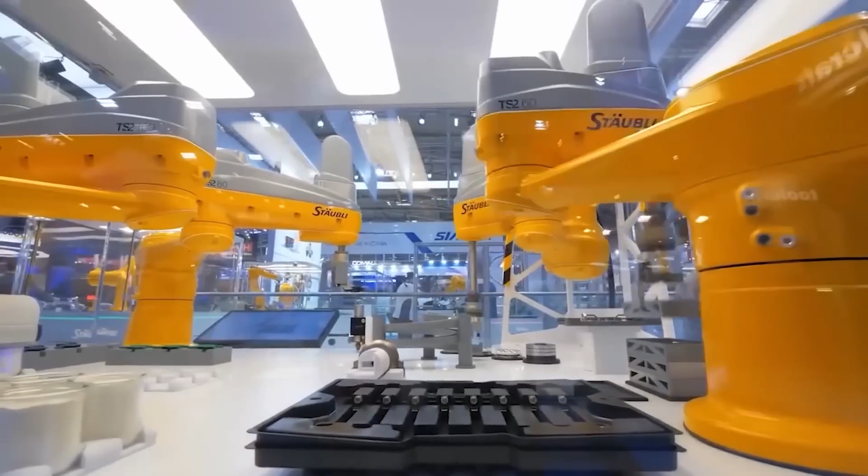But that narrative completely collapsed overnight when Elon Musk stepped onto a sunlit stage at a surprise Tesla event and announced a breakthrough that sent shockwaves straight through Detroit, Tokyo, and Beijing. Tesla had unveiled a new battery architecture capable of delivering a mind-boggling 2,000-mile range on a single charge, alongside an astounding 4-minute fast charge time.

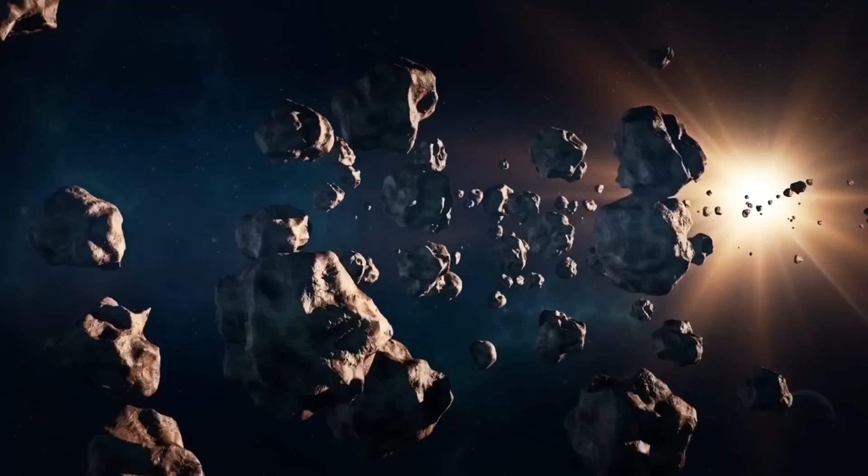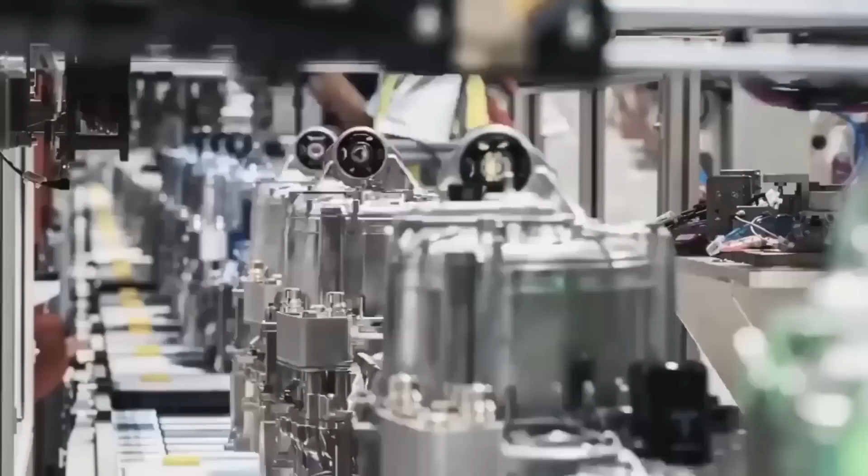The announcement did not just raise the bar for electric transportation. It obliterated the entire playing field, leaving legacy car companies and oil cartels staring into an abyss of immediate obsolescence. Wall Street trading desks went into absolute chaos as analysts scrambled to understand how Tesla accomplished what elite materials scientists

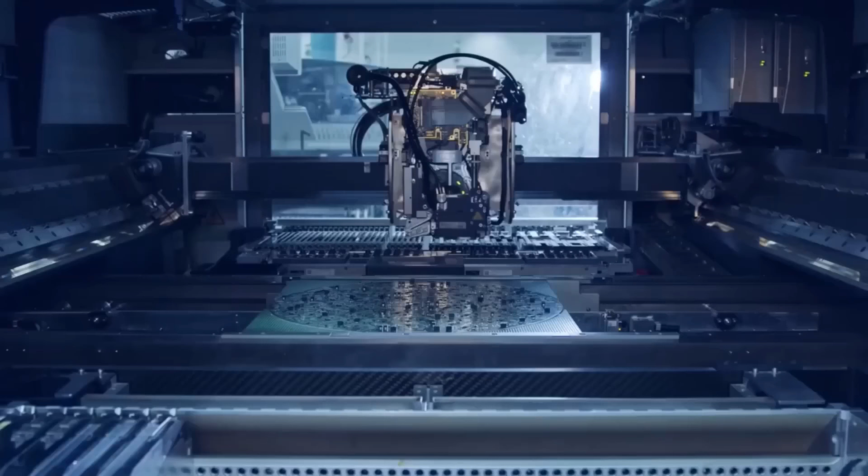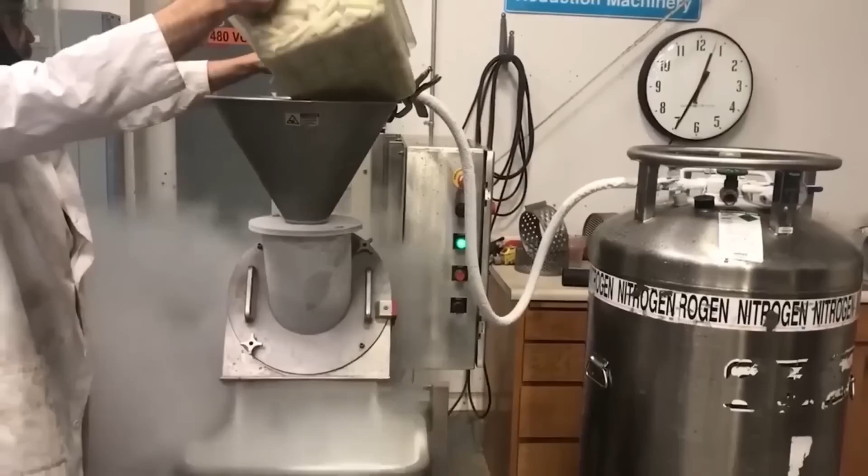insisted was impossible. But as the initial wave of euphoria settled across the internet, big questions began to surface regarding how this tech actually works and whether it is truly ready for mass production. And what revealed itself under the hood proved far more complex than anyone could have anticipated.

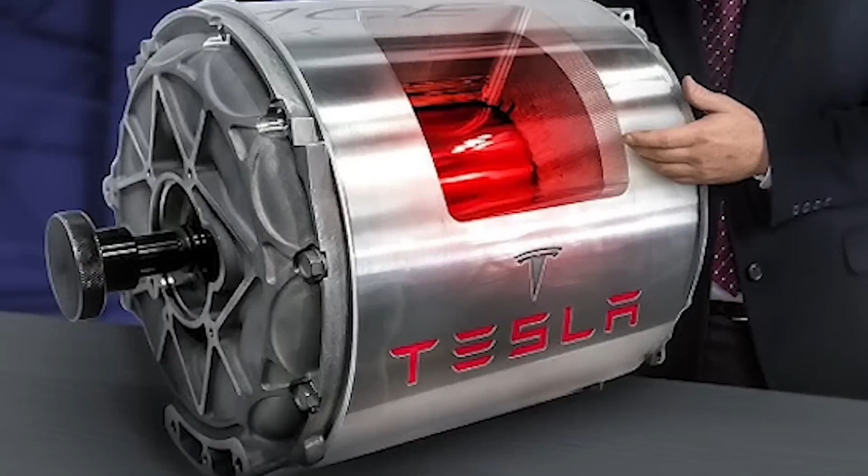For years, the EV industry was locked in a bitter struggle against the fundamental limitations of traditional lithium-ion cells. Standard electric vehicles rely on liquid electrolytes, where lithium ions slosh back and forth between a graphite anode and a nickel-manganese cobalt cathode. While effective, this chemistry suffers from severe energy density ceilings, high thermal sensitivity, and slow charging rates caused by heat buildup and lithium plating.

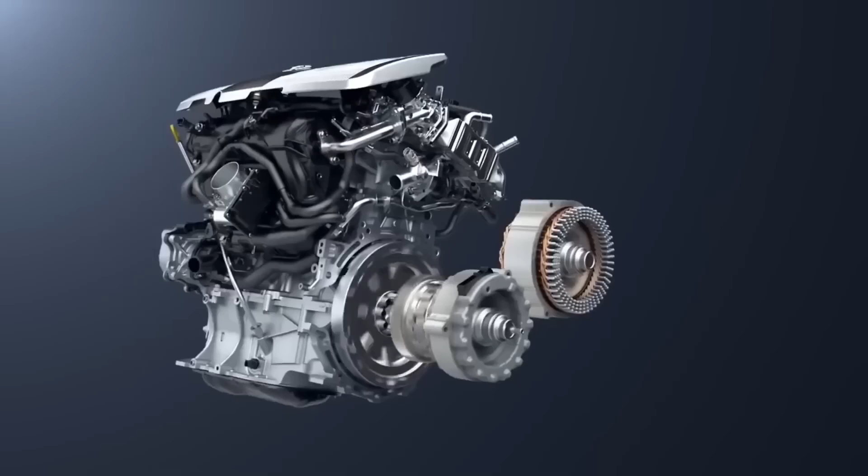Tesla's new power cell completely abandons these classic constraints by introducing a stabilized solid-state polymer ceramic matrix integrated with a nanostructured silicon anode. By replacing liquid fluid with a dense solid medium, Tesla managed to fit nearly 4 times the energy density into a pack that weighs less than the current Model S battery.

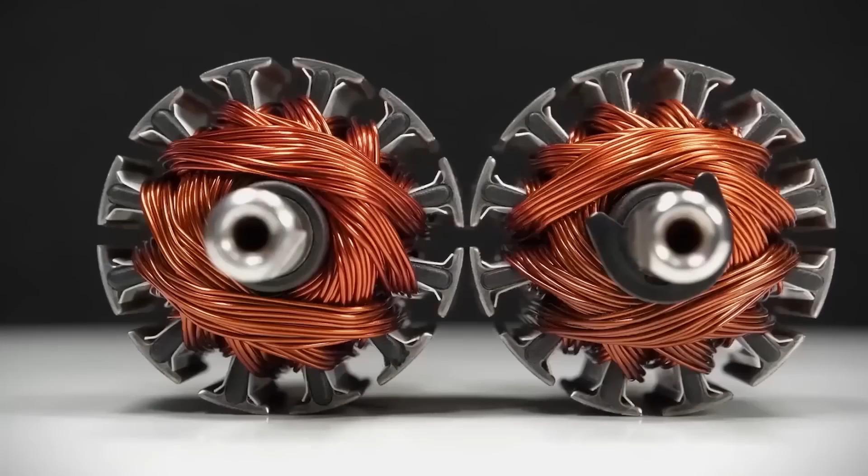Furthermore, silicon can hold 10 times more lithium ions than traditional graphite, but historical attempts to use it caused the material to swell up and crumble after only a few hundred cycles. Tesla solved this structural decay by wrapping microscopic silicon particles in an elastic graphene framework that expands and contracts naturally without degrading. The result is a pack so dense that range anxiety is killed off entirely in a single stroke.

But packing that much energy into a tiny space created an entirely new engineering nightmare that almost destroyed the project before it ever saw the light of day. To achieve a full charge in 4 minutes, a battery must accept an unprecedented torrent of electrical energy without overheating or melting its internal components.

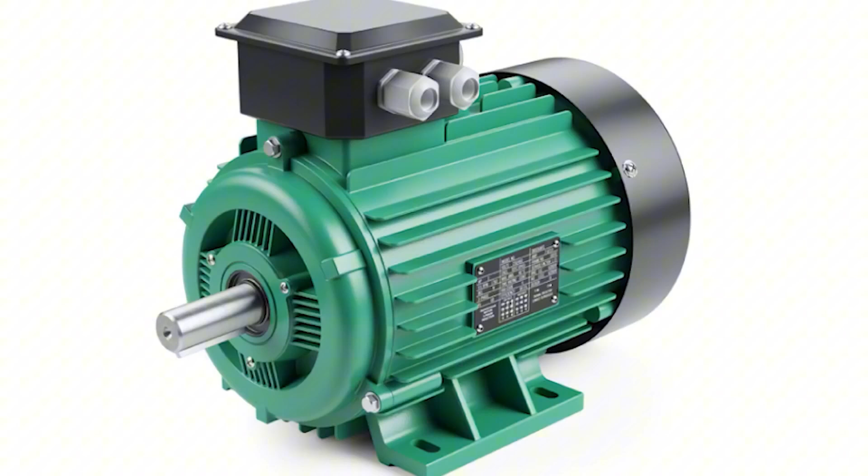Traditional fast chargers cap out at around 250 kilowatts, taking roughly 20 to 30 minutes to push an EV battery to 80%. Pushing 2,000 miles worth of power into a vehicle in 4 minutes requires charging speeds exceeding 1.2 megawatts, a massive power flow typically reserved for heavy locomotive trains or industrial power grids.

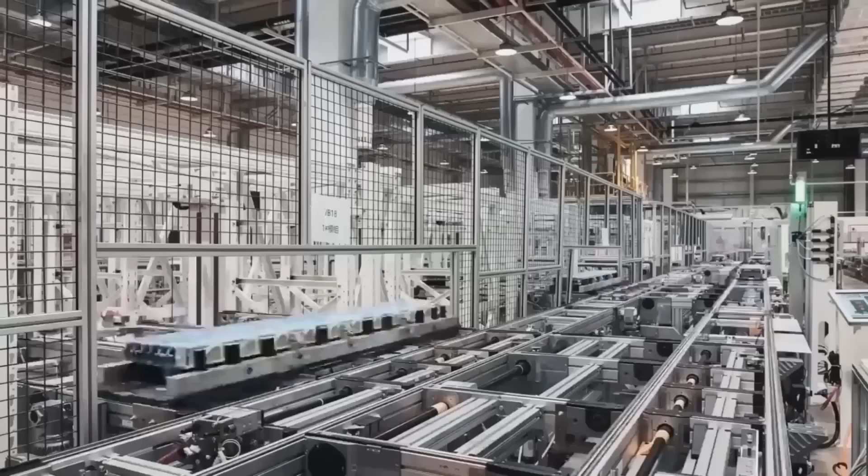To prevent the battery from violently overheating under this intense current, Tesla developed a direct immersion cryogenic cooling system using a non-conductive synthetic fluid that circulates directly around every individual cell. This liquid absorbs heat instantly, at the atomic level, keeping the solid-state chemistry perfectly stabilized, even as megawatt-level energy surges into the chassis. Engine components that would normally degrade under high heat remain completely cool to the touch throughout the

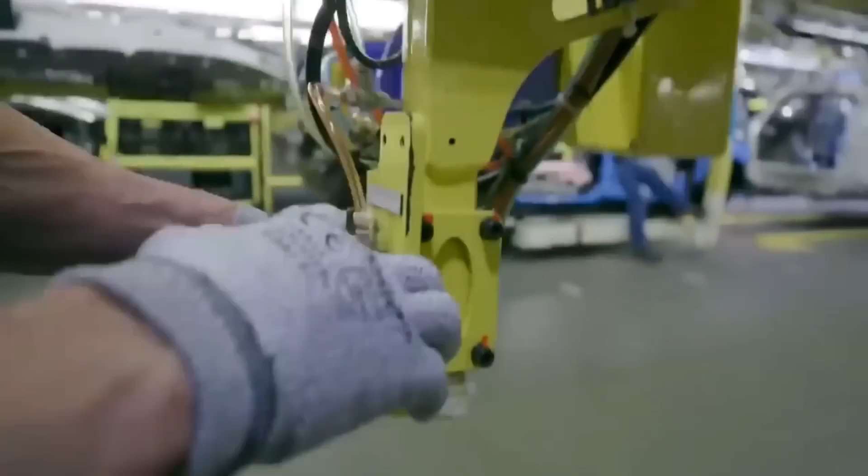entire process. The math behind it seemed almost unreal to veteran automotive engineers who had spent their entire careers claiming solid-state batteries could never handle high-current rapid charging without catching fire or forming microfractures inside the solid electrolyte. But Tesla didn't stop at solving the chemistry and thermal challenges, because manufacturing millions of these cells posed an even bigger hurdle.

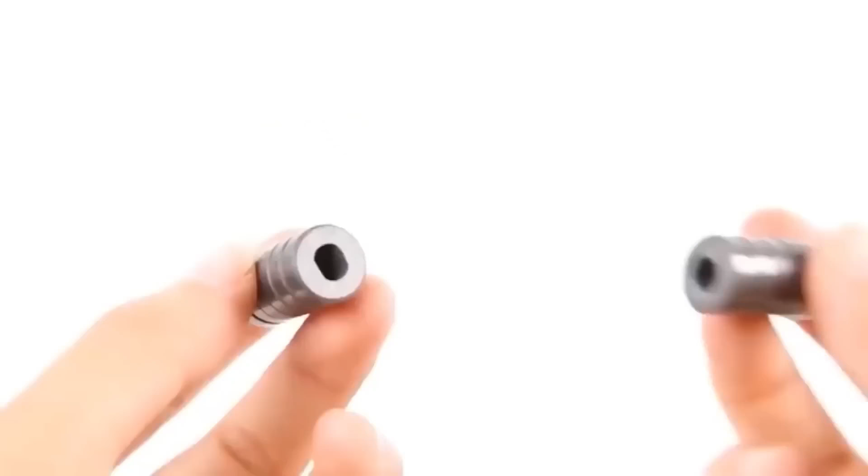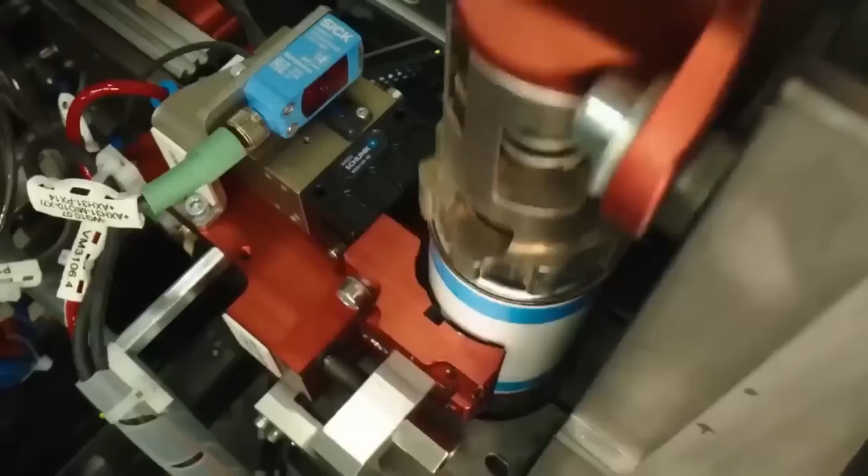The real secret behind this battery shift lies in how the cells are built inside Tesla's massive gigafactories. Traditional battery production requires massive, energy-inefficient baking ovens that take up miles of factory floor space to dry chemical slurries applied to copper and aluminum foils. This legacy wet coating method is notoriously slow, insanely expensive, and responsible for massive toxic solvent emissions.

Tesla bypassed this roadblock by perfecting the dry electrode coating process, a technology originally acquired from Maxwell Technologies years ago that took almost a decade of continuous engineering torture to master. By pressing dry chemical powders directly into ultra-dense metallic sheets using giant high-pressure rollers, Tesla completely eliminated wet solvents, toxic chemicals, and giant drying ovens from the production pipeline.

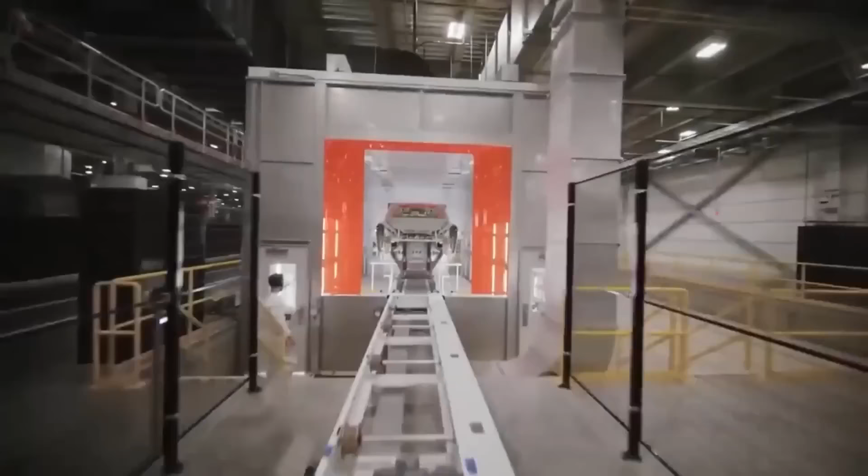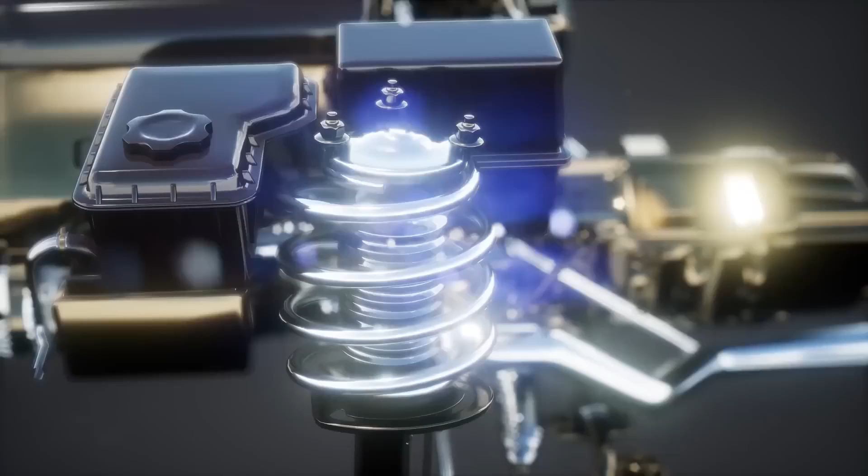This manufacturing shortcut slashes battery production costs by nearly 45%, while reducing the physical footprint of the factory by over half. Suddenly, the dream of a cheap, hyper-efficient, 2,000-mile electric car transformed from a theoretical science experiment into a terrifying commercial reality for every other automaker on planet Earth.

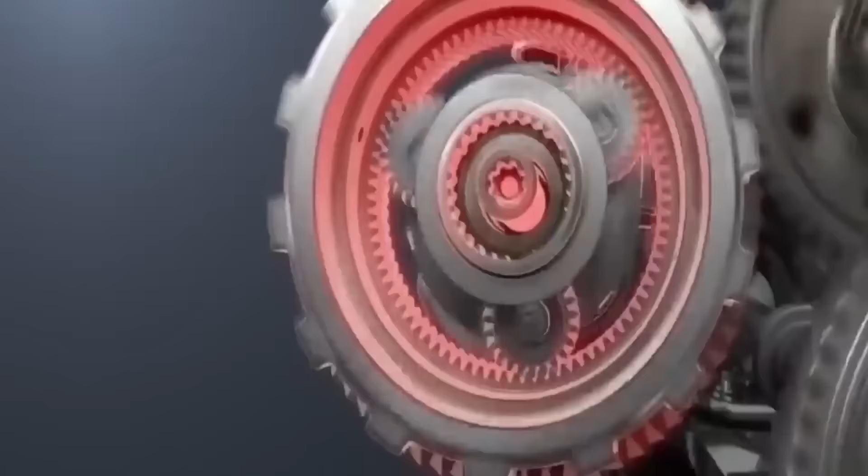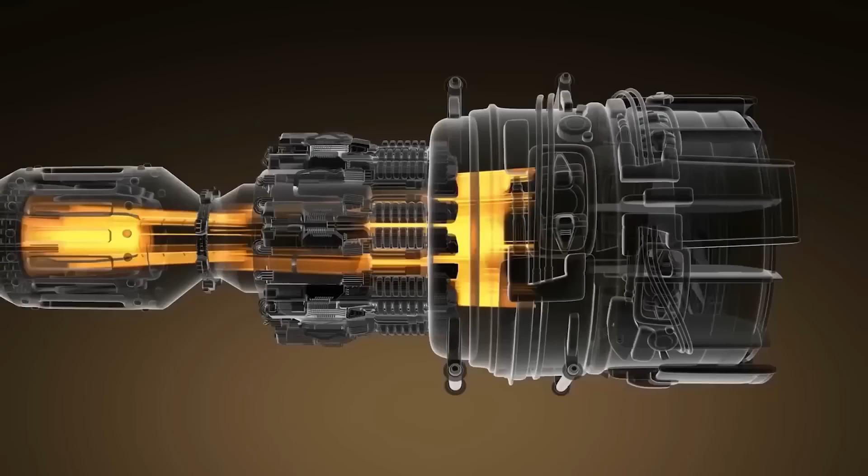And when news of this manufacturing efficiency leaked out to rival boardrooms, absolute panic broke out across the globe. In Tokyo and Detroit, executive teams called emergency board meetings to assess the damage to their long-term business models. For years, companies like Toyota had bet heavily on hybrid vehicles and slow-burning solid-state research programs, repeatedly assuring shareholders that full battery electric dominance was still decades off.

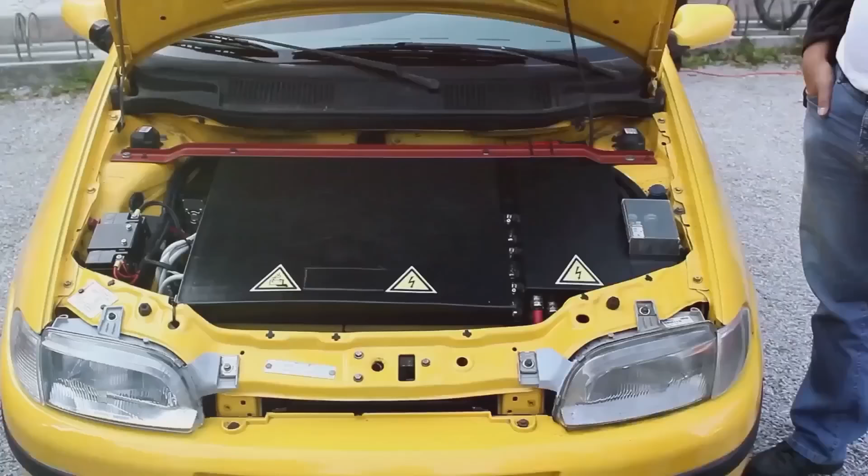Other legacy giants were already losing thousands of dollars on every single first-generation EV rolling off their assembly lines due to sky-high battery material costs. Tesla's sudden leap forward effectively turned existing multi-billion-dollar EV factories across the world into instant technological relics before they even reached full capacity.

If a consumer can buy an electric car that travels 2,000 miles on a 4-minute charge for less than the price of a standard gas sedan, the economic justification for internal combustion engines completely evaporates overnight. Gas stations, oil refineries, and traditional dealership service bays suddenly face a rapid glide path toward extinction, as consumer demand shifts violently toward zero-maintenance, ultra-long-range electric transport.

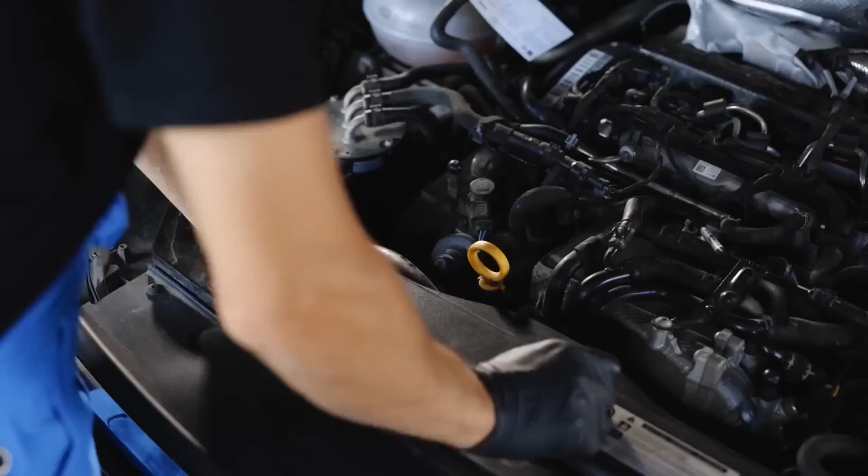Yet, while Wall Street hypes the stock to astronomical heights, veteran industry analysts point out that Elon Musk has a long and complicated history of making promises that do not always match up with real-world launch schedules. Critics and short sellers immediately seized on the announcement, reminding the public of past claims that took years longer to deliver than originally advertised.

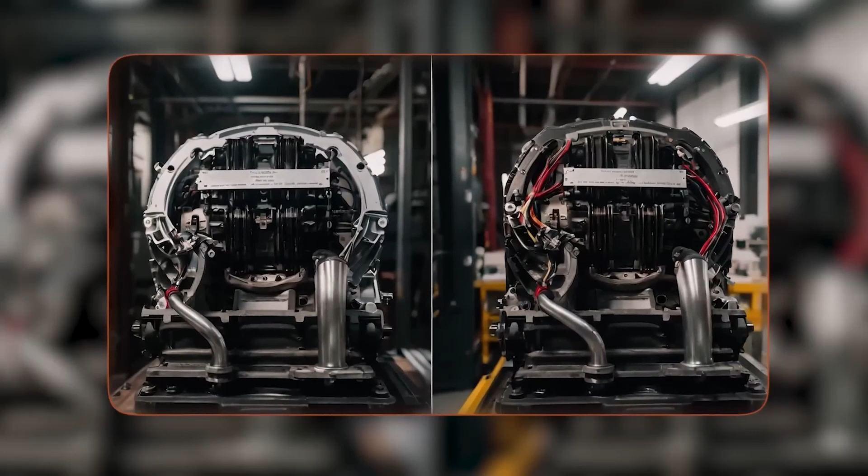From the full self-driving timeline to the long-delayed Tesla Roadster and Cybertruck production hell, skeptics argue that showing off a functional prototype cell in a laboratory setting is vastly different from mass-producing millions of flawless battery packs annually.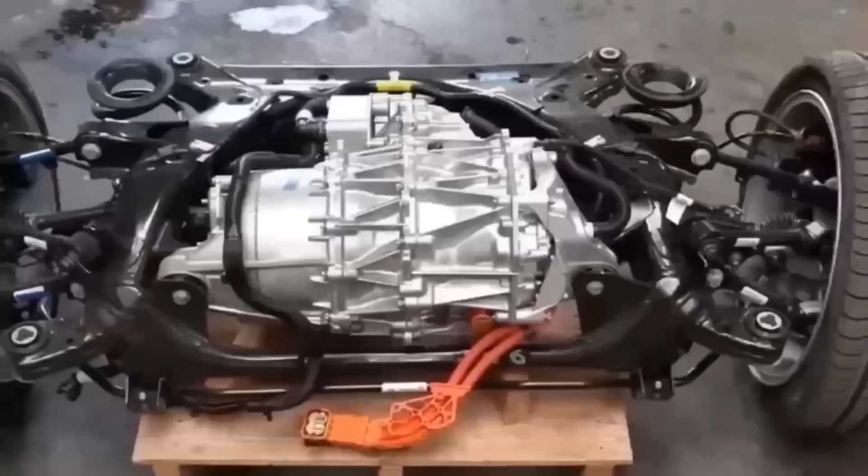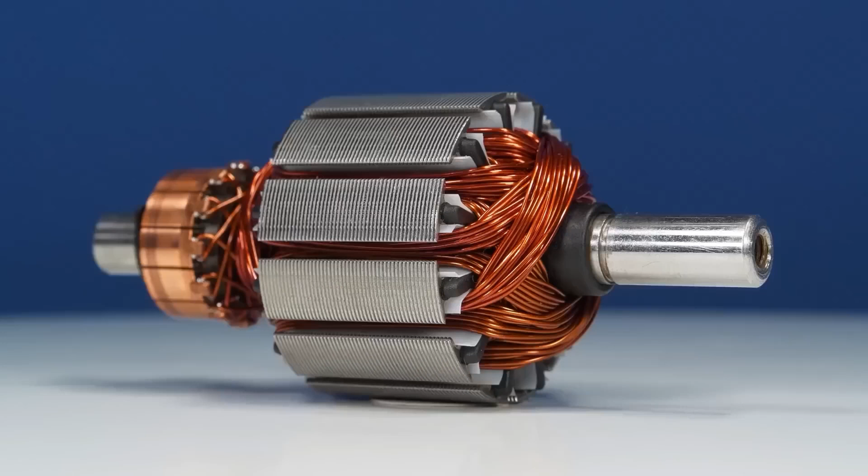Materials experts from elite universities quickly raised red flags concerning the long-term degradation rates of solid ceramic electrolytes subjected to real-world road vibrations, freezing winter temperatures, and intense summer heat waves. If tiny microcracks form inside the solid electrolyte over time, microdendrites could still short out the cell, causing sudden battery pack failure long before the promised million-mile lifespan is reached.

Furthermore, charging hundreds of thousands of 2,000-mile EVs at 1 megawatt simultaneously poses a terrifying threat to localized power grids that are already struggling under heavy loads. Power companies would need to invest hundreds of billions of dollars upgrading electrical substations and installing massive localized energy buffer banks to prevent regional blackouts every time multiple drivers plug in for a 4-minute charge.

But behind all the engineering debates and grid logistics lies an even larger conflict brewing on the global geopolitical stage. The race to build next-generation batteries has quickly transformed into the ultimate war for global economic and technological dominance. China currently controls over 70% of the world's lithium refining capacity, 85% of synthetic graphite production, and a near monopoly on critical rare earth processing.

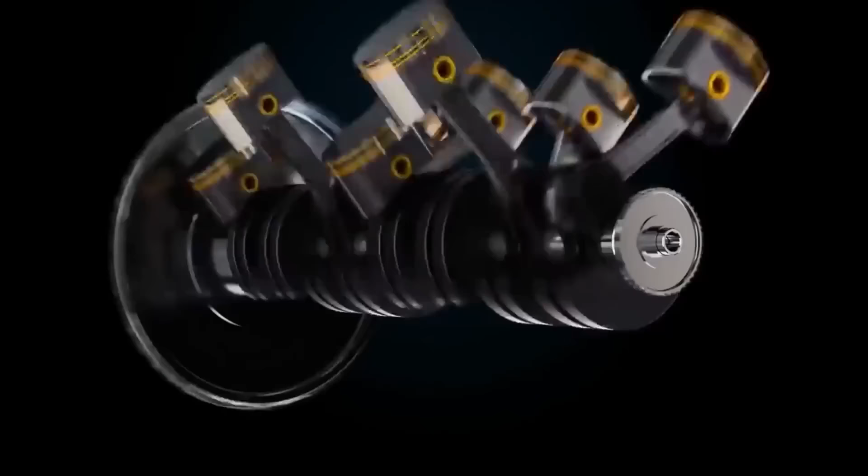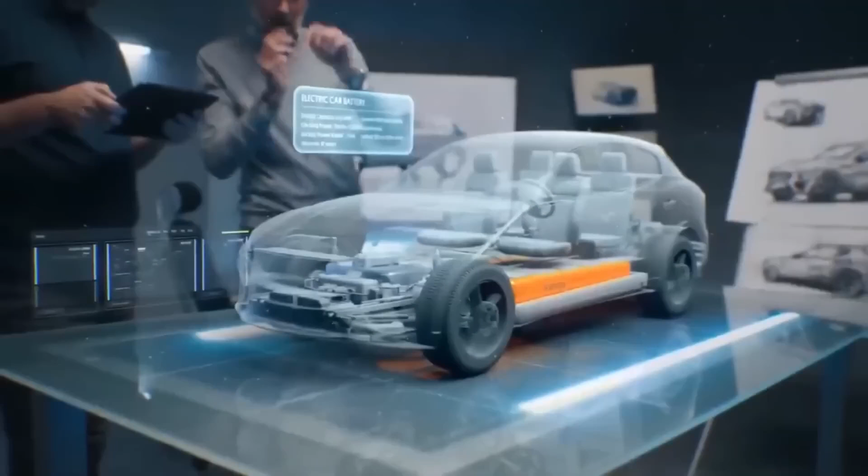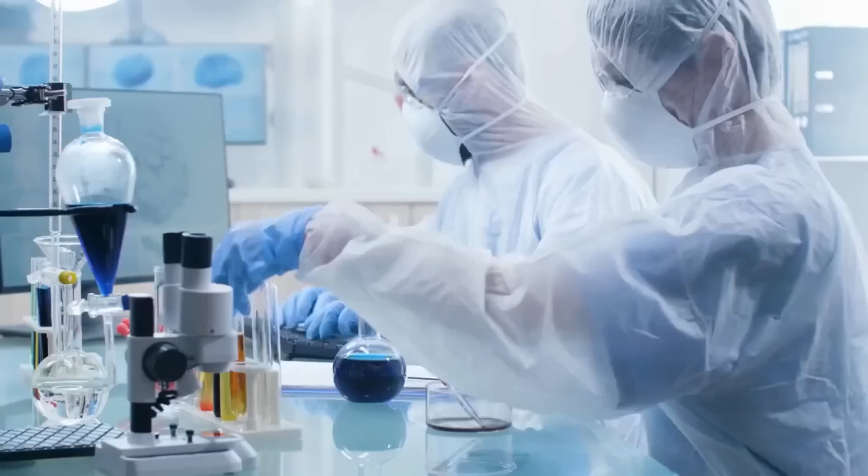Tesla's breakthrough shifts the primary raw material focus away from traditional refined graphite and towards abundant silicon and domestically sourced lithium deposits, bypassing traditional supply chain choke points controlled by foreign cartels. By establishing massive raw material processing facilities directly inside North America and securing localized supply chains, Tesla aims to completely insulate its production pipeline from foreign export bans, trade tariffs, and supply disruptions.

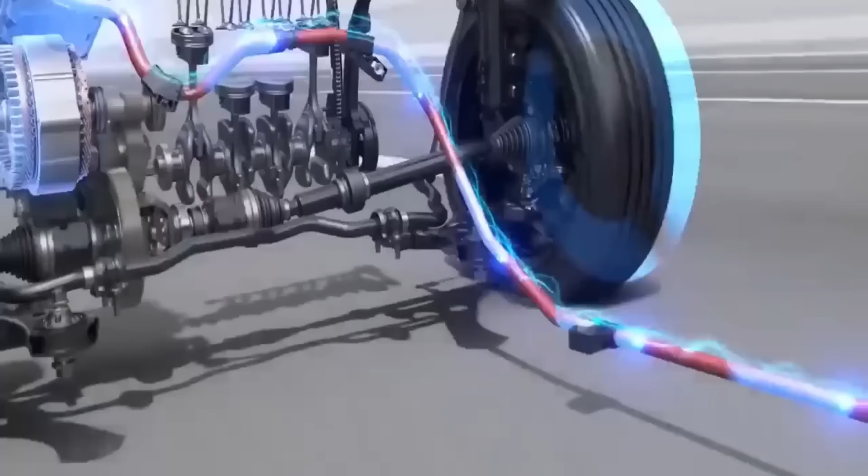This move not only threatens foreign battery juggernauts like CATL and BYD, but it also alters the geopolitical balance of energy independence for entire nations. Sovereign wealth funds, heavily invested in oil reserves, are suddenly forced to confront a world where oil demand could drop off a cliff far faster than predicted by energy agencies.

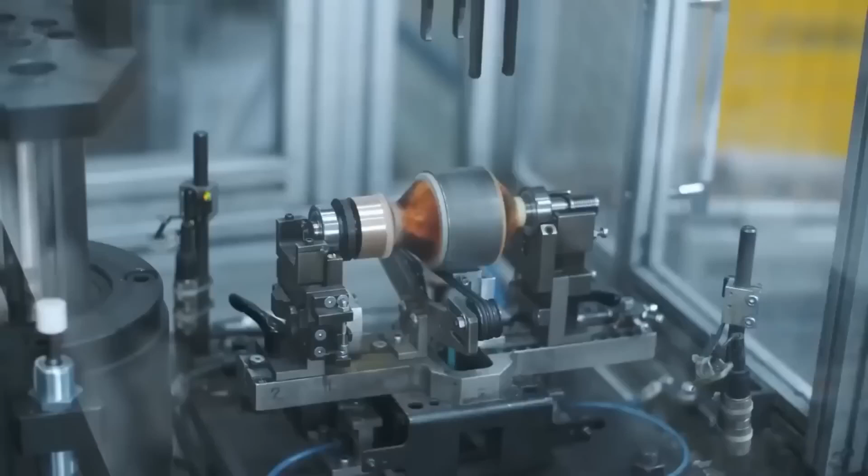Yet, just as the transition appears inevitable, hidden hurdles within Tesla's own manufacturing architecture threaten to slow down the entire revolution. Scaling the dry electrode process to produce billions of individual cells without microscopic defects has proven to be one of the most brutal engineering tasks ever attempted in modern industrial manufacturing. Even a microscopic dust particle, or tiny variation in powder thickness during the high-speed rolling process, can cause a catastrophic short circuit, rendering an entire multi-thousand-dollar pack totally useless.

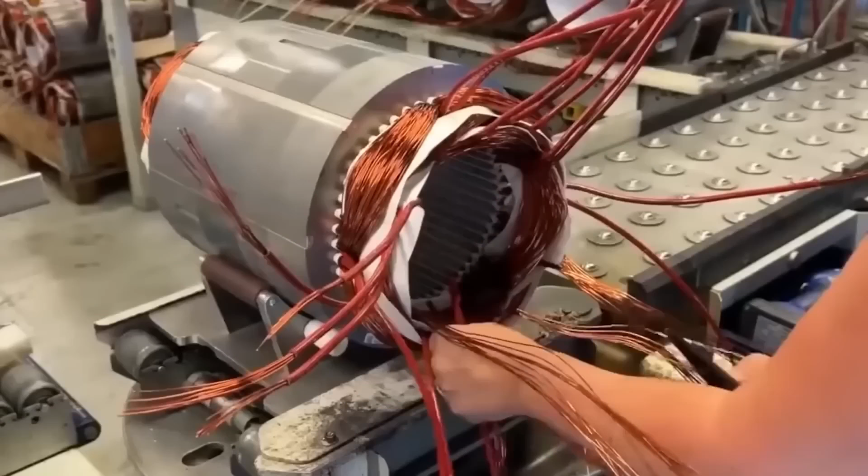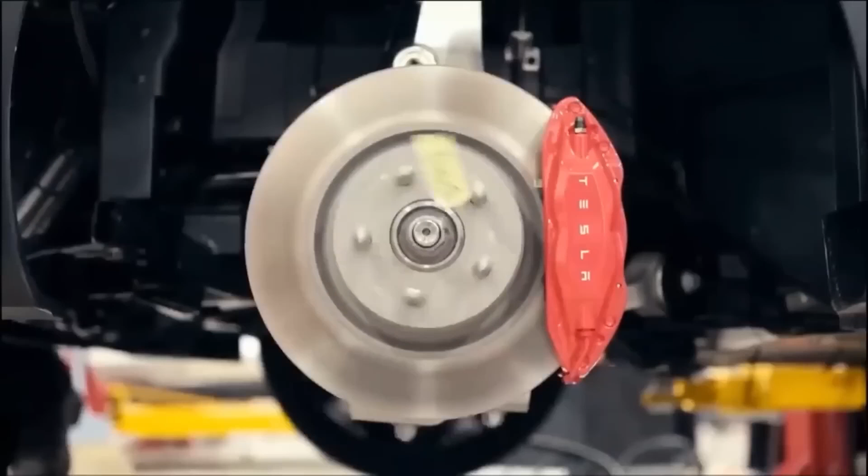Tesla's engineers are reportedly working around the clock inside Gigafactory Texas, attempting to calibrate advanced laser inspection systems and automated artificial intelligence quality control scanners to catch flaws in real time at microsecond speeds. Early yield rates for the new cell were rumored to be far below standard commercial viability, meaning Tesla must burn through vast amounts of cash and scrap material to refine the assembly line before mass production can hit full speed.

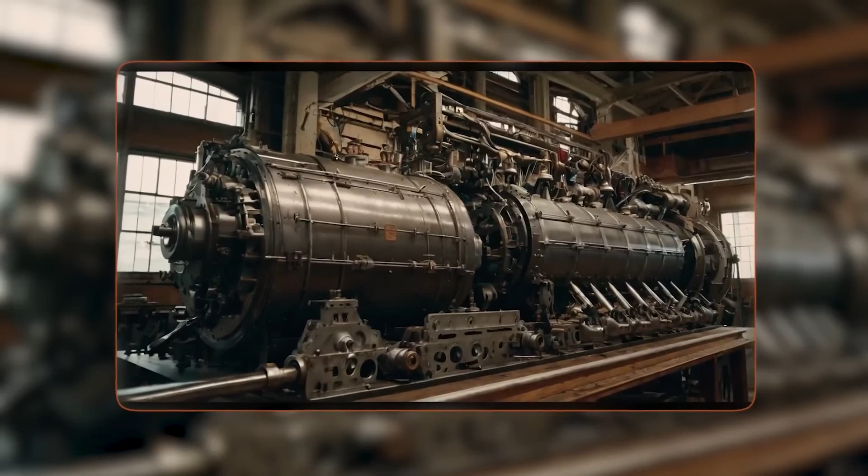If Tesla fails to overcome these yield bottlenecks quickly, the promised vehicle delivery dates could easily slip by months or even years, giving desperate rivals a tiny window of opportunity to catch up or engineer counter breakthroughs of their own. But if Tesla hits its yield targets, the implications for everyday society will extend far beyond just passenger cars.

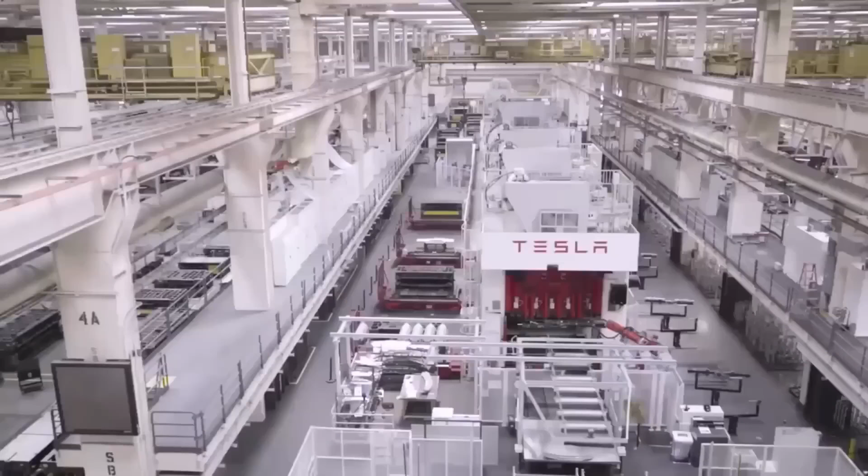Consider the immediate impact on commercial trucking, long-haul logistics, and air travel when energy density hits these high levels. Semi-trucks, which previously required massive, heavy battery packs that significantly cut into cargo capacity, could now haul full freight loads coast to coast, with minimal charging stops that match standard driver rest breaks.

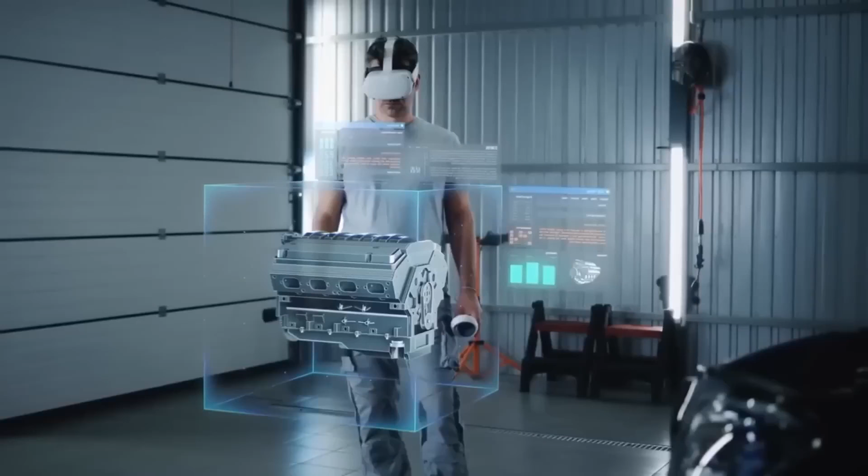Maritime shipping vessels, ferry networks, and even regional commercial aircraft could finally abandon diesel and jet fuel in favor of pure electric propulsion systems, drastically cutting global carbon emissions. The used car market would experience an unprecedented earthquake, as legacy gas vehicles and early-generation short-range EVs lose their resale value overnight, creating an unprecedented wave of technological obsolescence across global transportation networks.

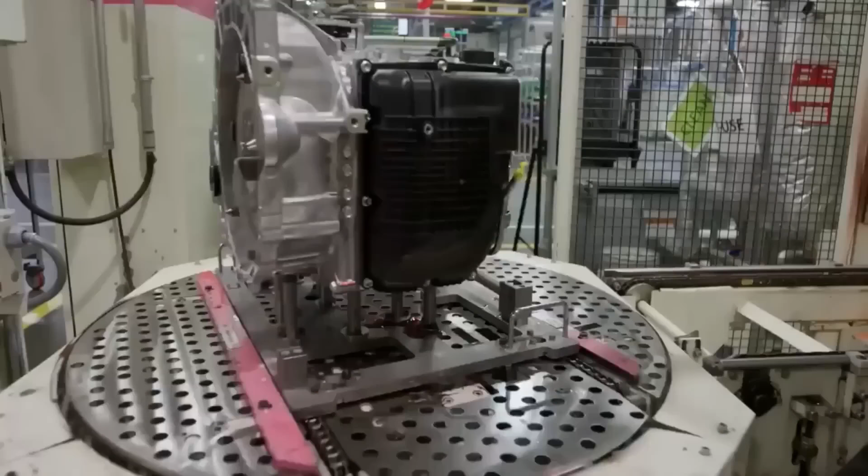Urban planning, highway rest stops, and commercial real estate would undergo a massive redesign to accommodate high-power megawatt charging hubs capable of cycling hundreds of vehicles through in a fraction of the time required today. The shift would represent the single largest energy transition since coal gave way to petroleum in the early 20th century.

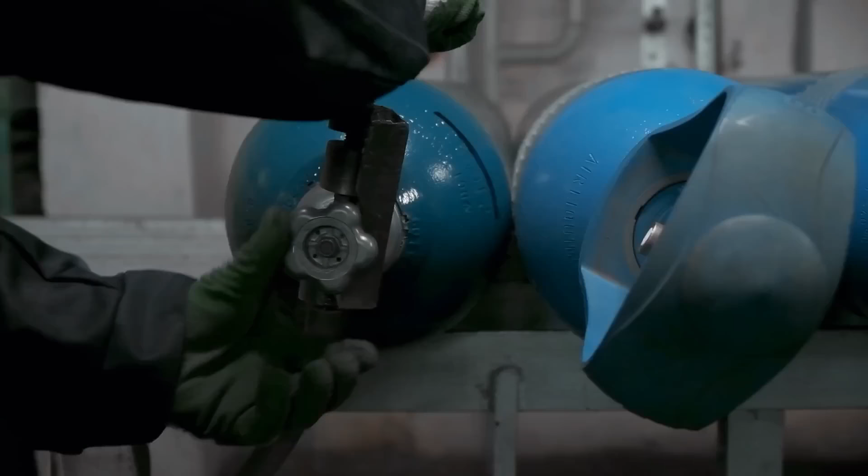As the smoke settles around Tesla's astonishing announcement, the automotive landscape stands forever altered, regardless of how fast production ramps up. Elon Musk has once again forced the entire industrial world to play catch-up, challenging fundamental assumptions about physics, chemistry, and manufacturing economics that stood unchallenged for decades. Whether this battery matrix hits public roads next year or faces delays while engineering teams master mass-yield production, the genie is officially out of the bottle.

The era of range anxiety, long charging waits, and reliance on fossil fuels for long-distance travel is rapidly drawing to a close, replaced by a high-voltage future moving at terrifying speed. The legacy automotive industry is running out of time, and the world is watching closely to see who survives the coming storm.

When you zoom out and analyze the broader trajectory of human transportation, the jump from gas to electricity was always hindered by one single metric: gravimetric energy density per kilogram. Gasoline is insanely energy dense, meaning a small tank can carry a heavy metal vehicle for hundreds of miles. For decades, electric vehicle batteries were simply too heavy, too inefficient, and too slow to recharge to truly replace the convenience of liquid fossil fuels.

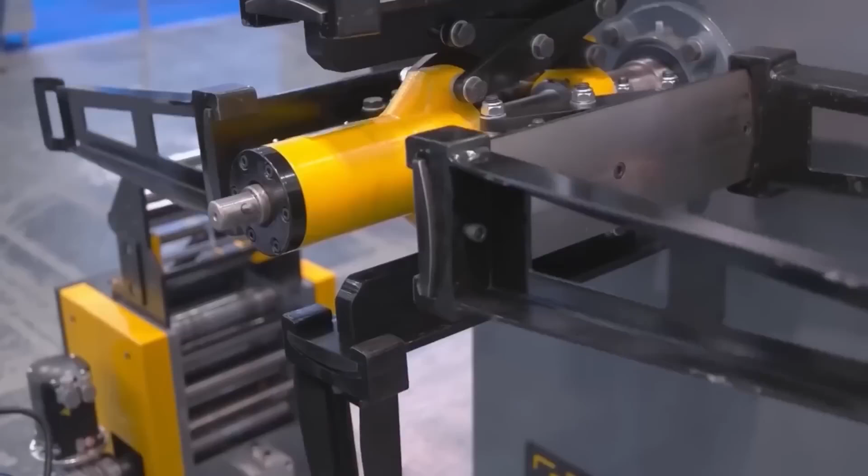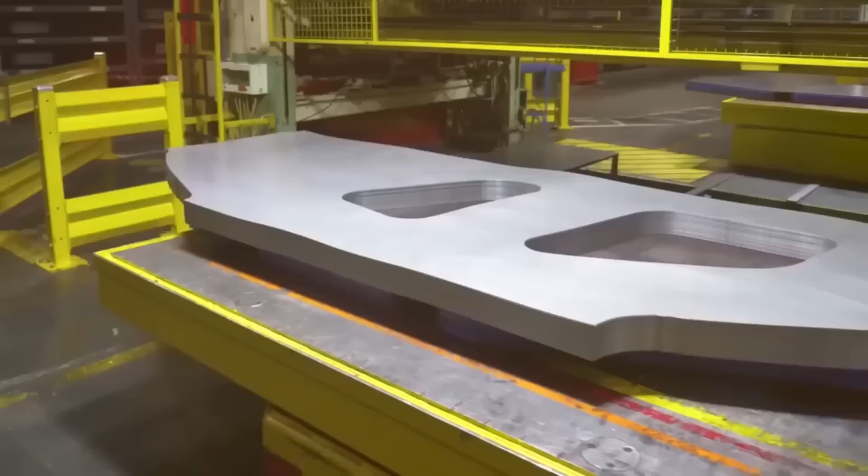By pushing energy density past the 800 watt-hour per kilogram threshold, Tesla effectively closed the historical gap between liquid petroleum and electrochemical storage. This means that for the first time in modern history, an electric drivetrain is not just an environmentally friendly alternative, but a strictly superior machine in every measurable performance metric. Acceleration, maintenance costs, structural safety, center of gravity, and now range and refueling speed all heavily favor the electric architecture.

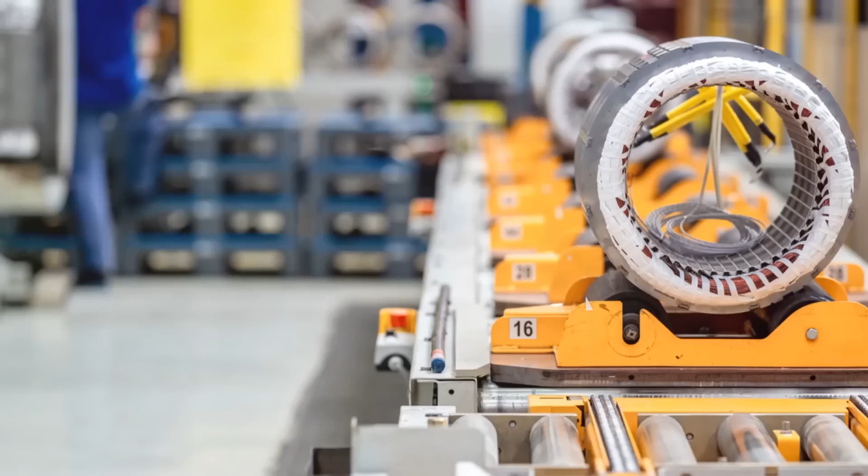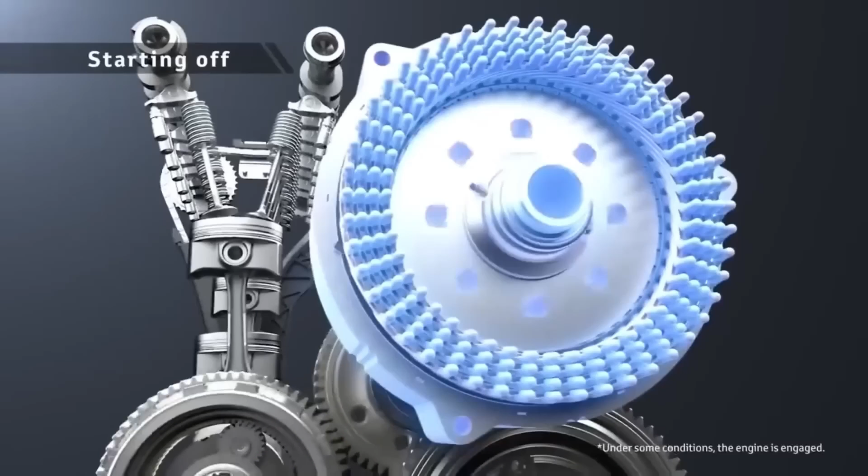The ripple effects on global financial markets are already proving to be staggering. Investment funds that spent decades parking billions of dollars in traditional automotive stocks are now frantically reallocating capital into advanced battery technology, raw silicon mining, and grid infrastructure companies. Sovereign wealth funds across the Middle East are accelerating their diversification efforts, fully aware that if petrol demand tanks over the next 15 years, the geopolitical power held by oil-exporting nations will collapse like a house of cards.

Meanwhile, technology giants in Silicon Valley and Asia are watching Tesla's vertical integration model with intense anxiety, realizing that Tesla is no longer just an automaker, but an energy ecosystem, AI robotics developer, and battery manufacturing powerhouse rolled into one single dominant force.

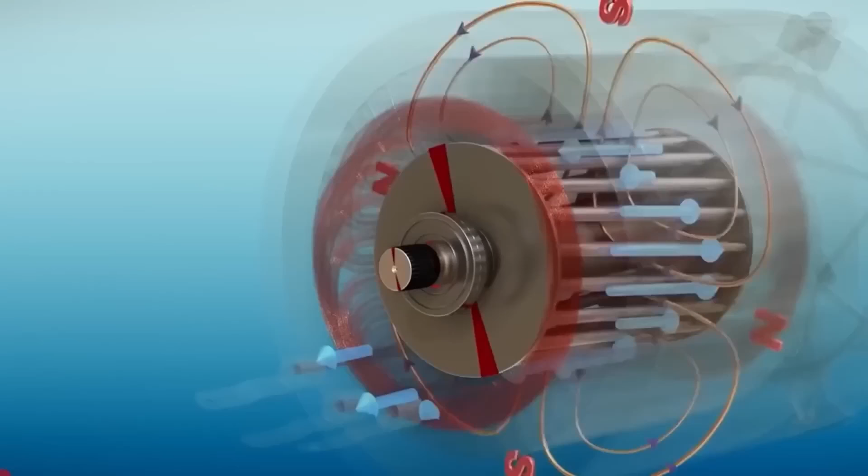Inside Tesla's engineering division, the push to master this new architecture has ignited an internal space race of sorts. Reports indicate that teams are working in continuous 24-hour shifts, using supercomputers, running complex digital twin simulations to predict atomic-level battery degradation under extreme stress. Every single variable, from ambient humidity during cell assembly to the exact molecular alignment of the silicon graphene anode, is being analyzed to eliminate any chance of failure in the field.

Elon Musk knows that if these batteries roll out with high failure rates or fire hazards, the regulatory backlash could set the company back by a decade and permanently damage public trust in solid-state technology. The pressure on the ground is immense, and the margins for error are practically zero. At the same time, municipal power authorities are trying to figure out how to prepare for the inevitable surge in grid demand.

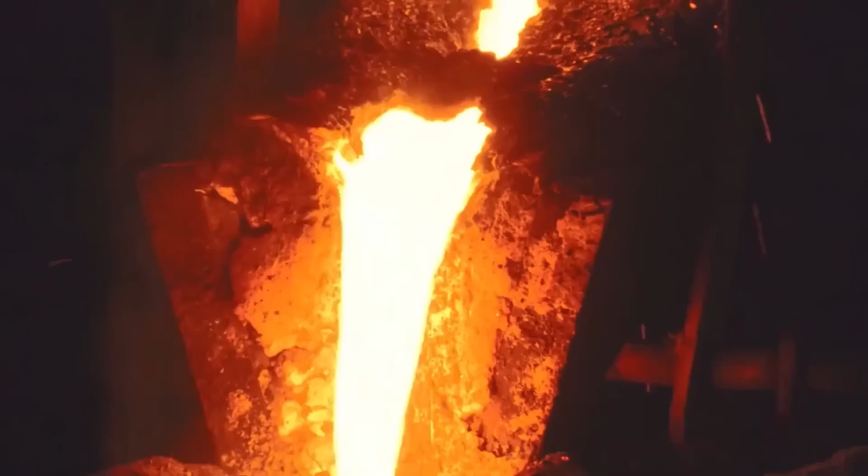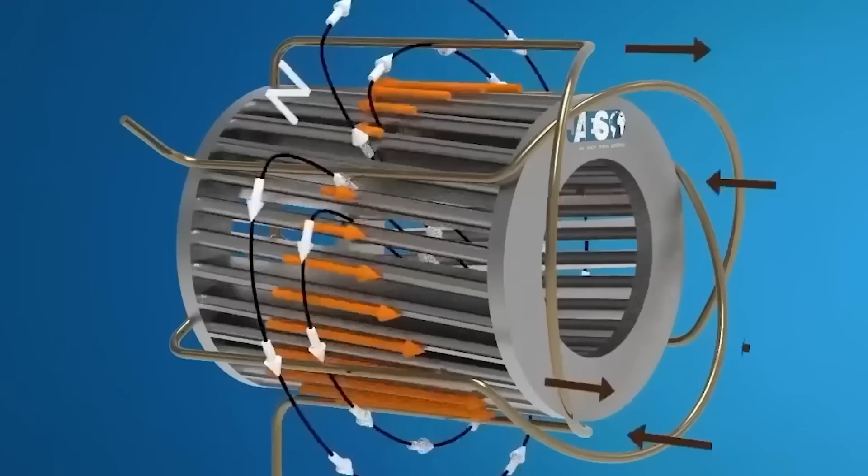A charging station featuring 20-megawatt capable stalls would draw as much electrical power during peak hours as a small regional airport or an entire suburban shopping mall. To prevent localized power grids from collapsing under the weight of this massive energy draw, Tesla is quietly deploying industrial-scale megapack battery storage installations directly alongside every planned ultra-fast charging location.

These massive storage banks charge slowly from the main power grid during off-peak hours, or gather energy directly from local solar microgrids, acting as massive energy reservoirs that discharge instantly into vehicles during 4-minute fast charges. This genius buffer strategy keeps localized power lines from melting while allowing drivers to blast their batteries with insane amounts of power in minutes. Consumer psychology is another critical piece of this puzzle that cannot be overstated.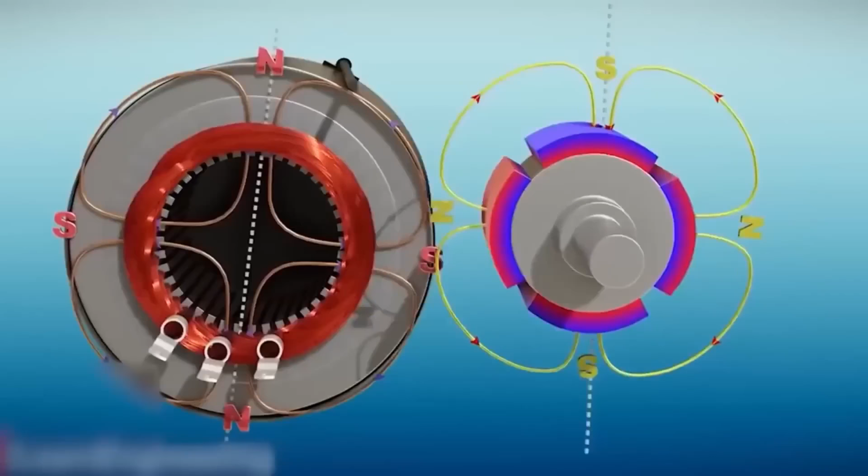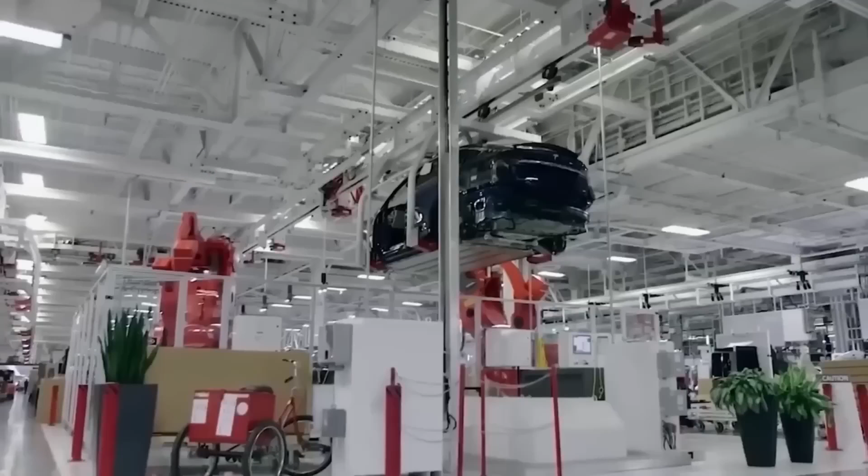For years, mainstream car buyers held back from buying electric cars due to deep-seated fears of getting stranded in the middle of nowhere during winter storms or long road trips. The idea of standing in a cold, dimly lit parking lot for 40 minutes, waiting for a car to reach 80% charge, kept millions of families locked into gas-powered cars.

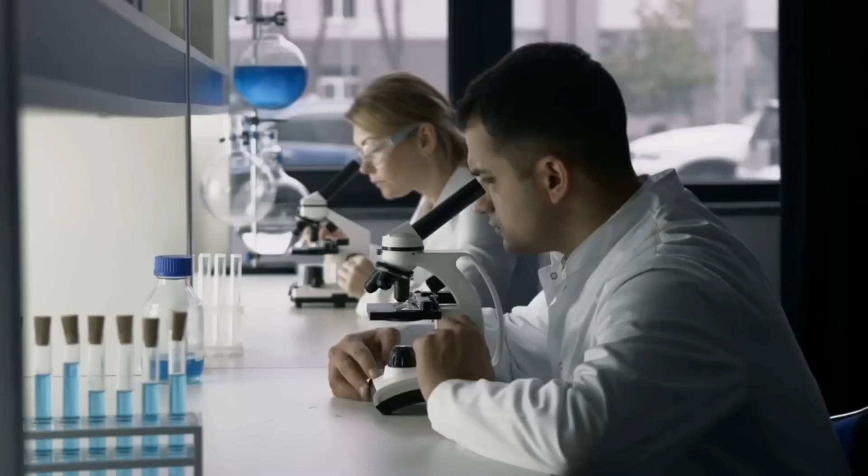A vehicle that offers 2,000 miles of range effectively means the average commuter would only need to plug in their car 3 or 4 times per year. The psychological comfort of knowing you can drive across 3 state lines on a whim without ever checking a charging map completely removes the final barrier to mass-market consumer adoption.

As other car manufacturers realize they cannot match Tesla's battery chemistry through conventional supply chains, a wave of corporate consolidation is likely on the horizon. Smaller legacy brands that lack the capital to fund multi-billion-dollar battery research and development programs will be forced to merge, seek government bailouts, or license Tesla's proprietary battery technology just to stay solvent.

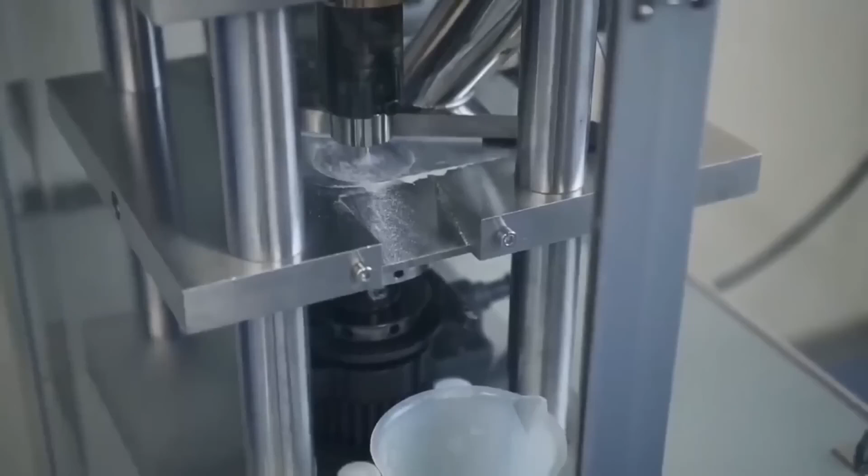We could soon enter an era where cars built by rival brands are powered entirely by Tesla battery cells, Tesla motors, and Tesla software underneath the bodywork. This level of market dominance would give one company unprecedented control over the world's transportation backbone, transforming Tesla into the ultimate monopoly of the 21st century.

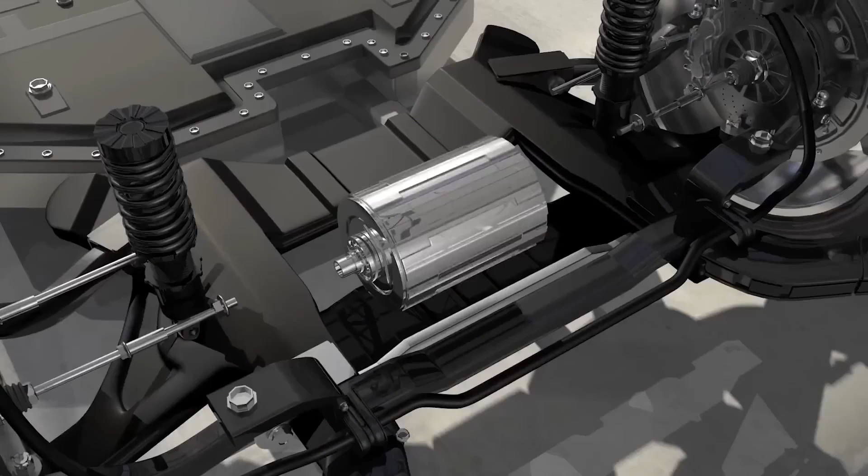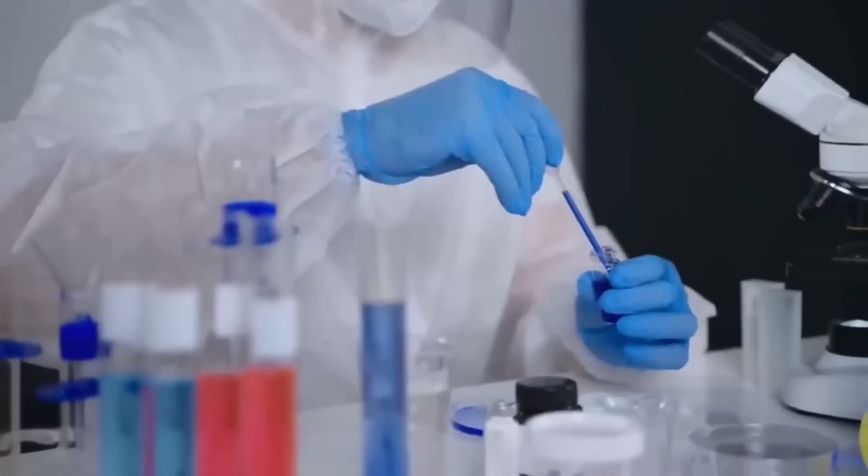The technical reality of the silicon anode also opens up exciting possibilities for next-generation vehicle design. Because the new solid-state battery pack takes up a fraction of the physical volume required by older lithium-ion units, automotive designers are no longer forced to build vehicles around massive, heavy floorboards. This allows for radically improved aerodynamics, lower vehicle profiles, lighter overall weight, and dramatically increased cabin space for passengers and cargo. Future vehicles could look entirely different from anything currently on the road, taking full advantage of the spatial freedom created by dense, ultra-compact energy storage modules.

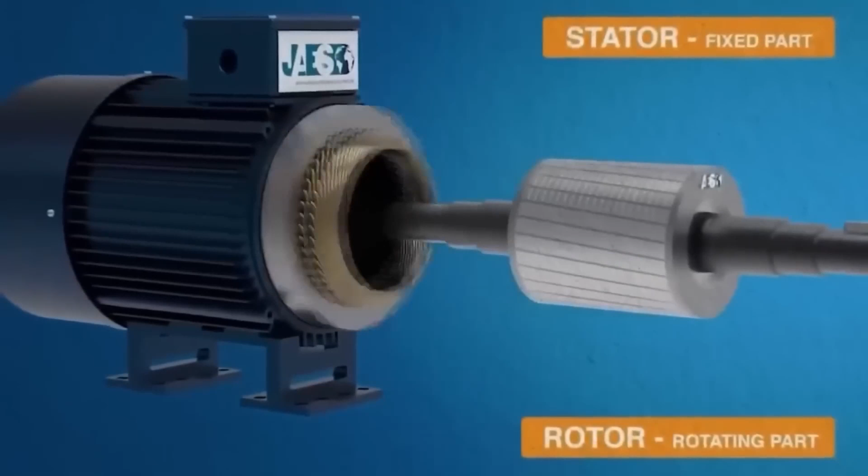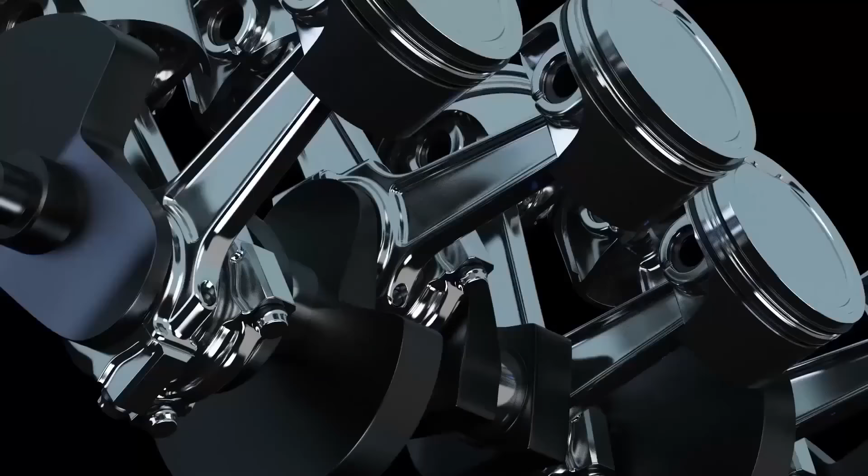Despite the enormous promises, environmental groups are keeping a watchful eye on how raw materials for these hyperdense cells will be sourced and processed. While eliminating cobalt and heavy graphite reduces reliance on controversial overseas mining operations, scaling up domestic lithium extraction and ultra-pure silicon refining carries its own environmental footprint.

Tesla claims its closed-loop recycling program will allow over 99% of raw materials from old battery packs to be recovered and reused in new vehicles, creating a truly circular supply chain that minimizes the need for continuous raw material mining over time. If successful, this circular economic model could set a new global benchmark for sustainable heavy industrial manufacturing.

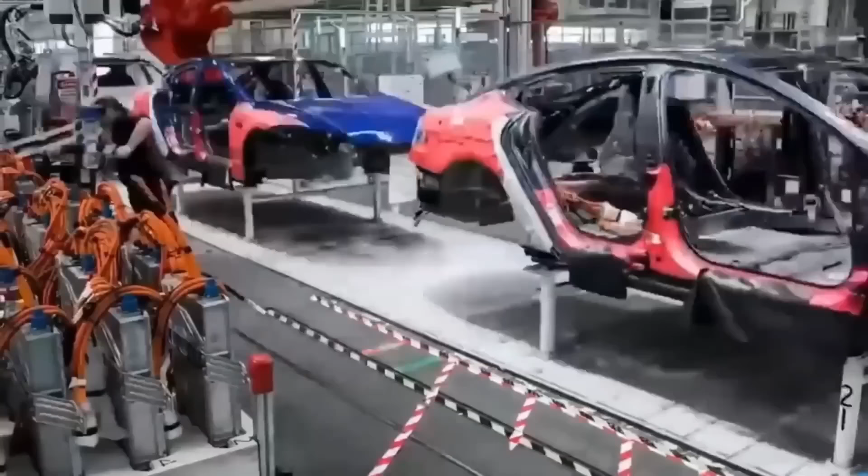Every major industrial revolution in human history was defined by a fundamental upgrade in energy storage and delivery. The shift from wood to coal enabled the steam engine. The refinement of oil unlocked the internal combustion engine and aviation, and the mastery of nuclear power transformed global electricity grids. Tesla's new solid-state battery milestone is not just an incremental improvement to an existing car part. It is the next logical step in humanity's mastery over energy storage density.

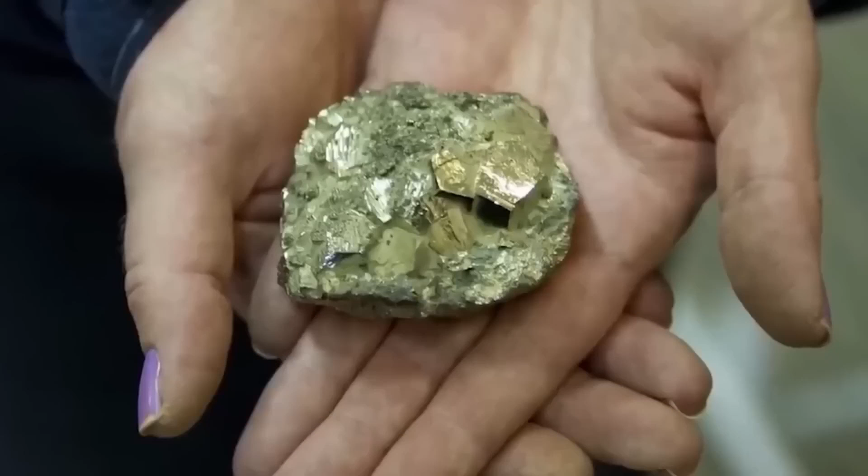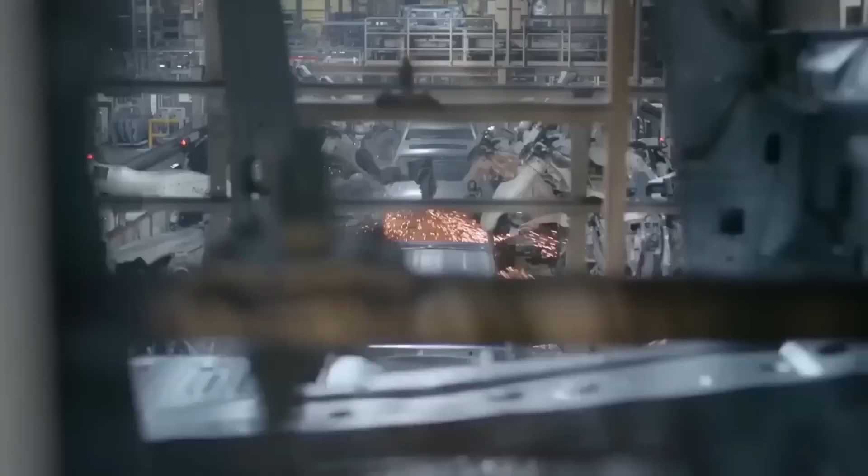The implications will ripple through society for generations to come, altering where we live, how we travel, and how we interact with the physical world around us. As we look toward the horizon, one thing remains undeniably clear. The transition to a fully electrified, ultra-efficient world is no longer a distant theoretical dream reserved for future generations. It is happening right now, accelerated by relentless engineering, terrifying economic incentives, and an unyielding drive to break through every physical barrier standing in the way.

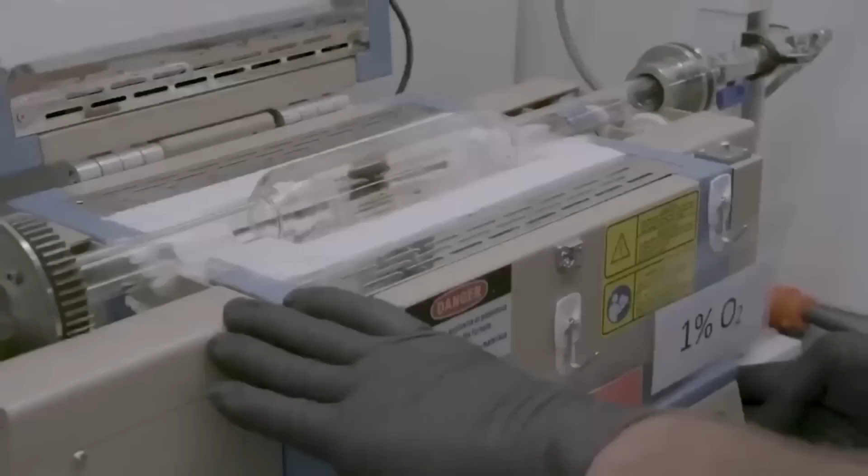Whether legacy automakers adapt in time or fade away into the history books, the journey toward a zero-emission, hyper-connected transportation grid has reached an absolute point of no return. The race is officially on, and the world will never be the same again.